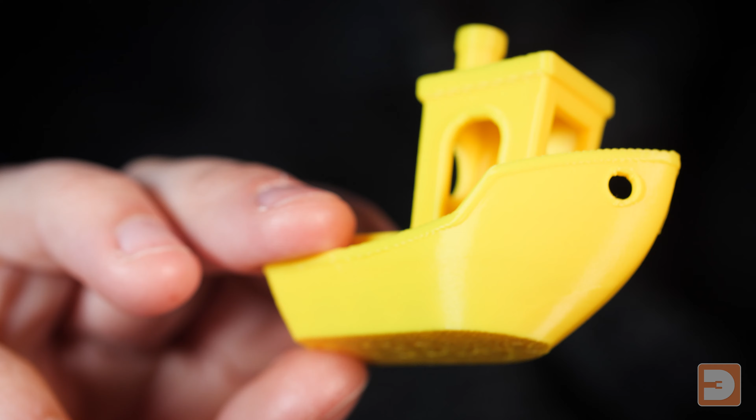When you compare one of these 17-minute benchies, however, to one that is printed at a previous generation speed, whilst the quality is still very similar, you'll notice that on the vertical sides, the finish is very different. This 3D Benchy was printed on the Bambu Lab X1C, but roughly at the default print speeds that would have been used by previous generation 3D printers. Whilst it's printed in a particularly thick layer height of 0.24mm, you can see that the hull is still particularly smooth and shiny. Watch how the reflection rolls over the curve as I turn it.

This Benchy was also printed on the Bambu Lab X1C with the exact same settings, with the exception of this was printed at the speeds that Bambu Lab is famous for, taking just 17 minutes. Take a look at the hull and the vertical sides and note how much more matte the finish has come out on these surfaces. If you see them side by side, it may look a bit more obvious.

So as you've seen here, the print speed is one of the primary things which can affect the surface finish of a print. This is because the faster the print, the lower the precision of material placement right down to a molecular level, and also the more drastic the rate of temperature change for the filament. This is becoming so much more obvious to so many more people because the maximum speed of an average printer has rocketed from around 200 to 250 millimeters a second to 500 and even 600 millimeters a second, more than doubling the potential speed whilst printing.

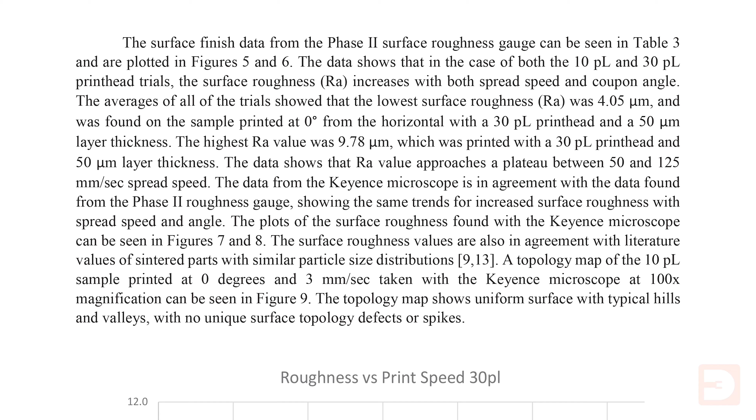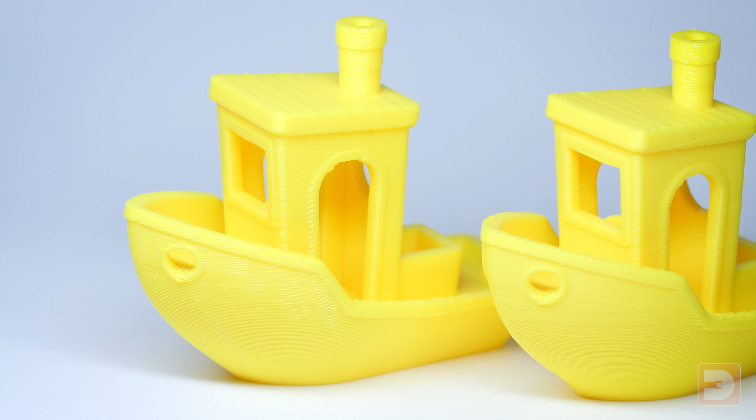There's an interesting paper which I'll link to in the description below, which finds that this effect can actually be more pronounced at layer heights of 0.06 to 0.1mm, and at 0.2mm layer height it can actually be less significant. These benchies were printed at 0.24mm layer height, so slightly above the optimal layer height for faster printing according to that paper. This means that at 0.1mm layer height, this faster Benchy would have an even more matte, rougher finish.

Now there's a suite of speed settings in your slicer, but it's important to note that you don't need to slow all of these down to improve your surface finish. Whilst you might get this problem with a number of new printers and using any slicer, in this video I'm going to be using the X1C and Bambu Studio for the example, but the settings that I refer to in this video can be transferred to any printer and any slicer. Just make sure that the speeds that you're setting them to are appropriate for the filaments that you're using.

Let's jump to a Bambu Lab preset for 0.2mm standard and head over to the Speed tab. The settings in this preset are appropriate for the Bambu Lab X1C, and so it's capable of achieving all of these speeds if not faster. However, the only things that you need to change at your end are the specific settings I'm about to adjust. As a result, providing you start with settings that work on your machine and just change the ones that I'm suggesting by reducing them, this will work with any slicer on any printer.

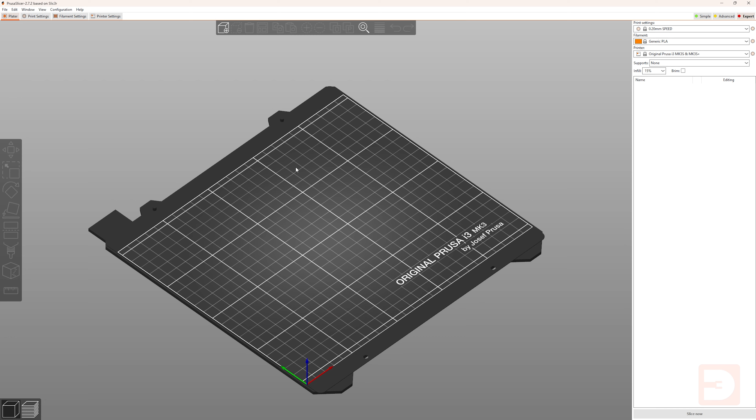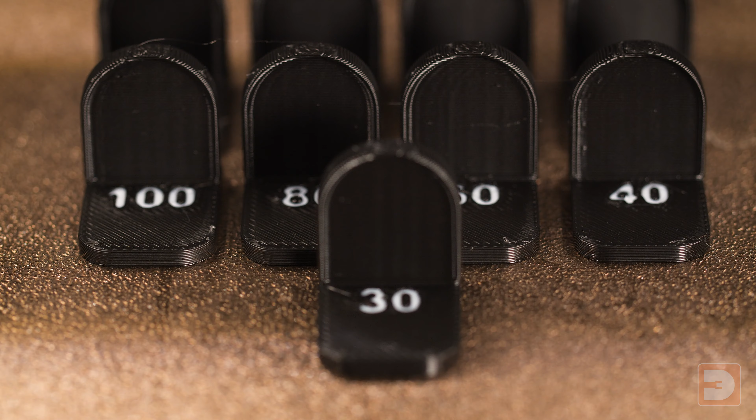Now, as the thing that we're trying to change here is the texture on the surface of your prints, the two primary settings that we want to change here are the outer wall speeds and the top surface speeds. The outer wall speed in this preset is set to 200mm a second. By contrast, the default speed for outer walls in Prusa Slicer, which is referred to as external perimeters in the print settings menu, is 35mm a second. To find the optimum speeds to use here, I designed a simple test print to see what the surface finish would look like at different speed increments.

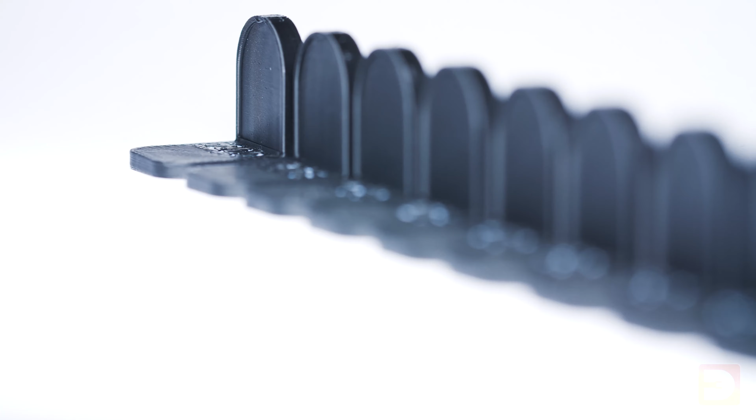Each of these test prints is printed with the same settings except for the outer wall speed and the top surface speed, which is set to whatever the number is printed on the item. If we take a look at how they came out, we can see that as it slows down from 200mm a second, they get gradually smoother and more shiny.

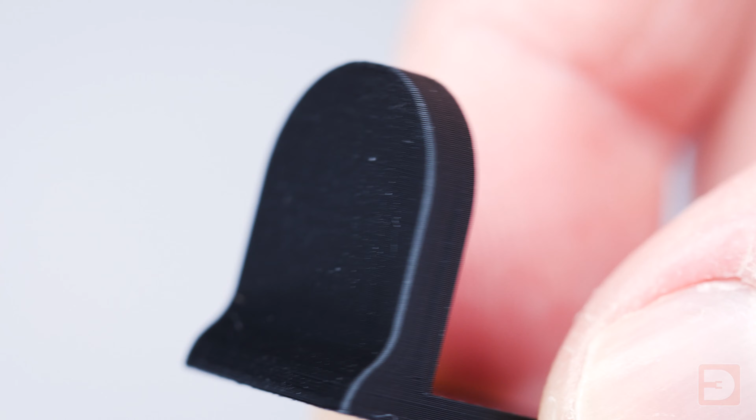I personally feel that 40mm a second provides the best surface finish for the outer wall speed, as I don't really see much of a difference between 40 and 30, so I'm going to go with 40mm a second for my outer wall speed. For the top surface finish, however, I've found that 30mm a second does provide a noticeable difference in quality, and so I'm going to enter 30mm a second as my top surface speed.

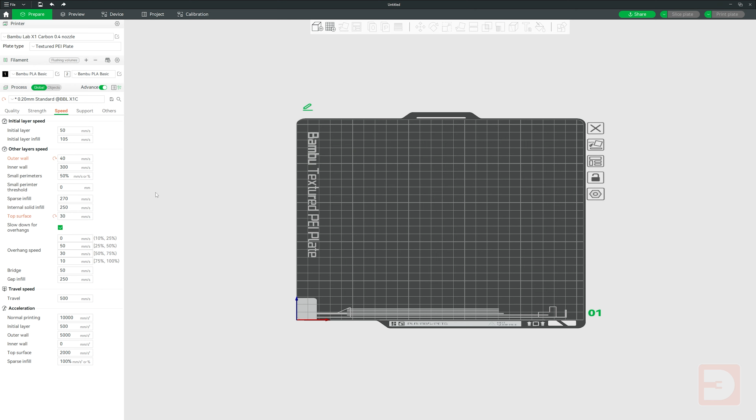It's worth noting that different materials, and even the same material from different vendors, can require different speeds to achieve the same surface finish, so the exact numbers and speeds that I'm showing you here may be different to what you need for your setup.

I've uploaded the designs for this test print that I've shown you here, so you can download them and run them on your own printer with your own filament to find the speeds that work for you, and I'll leave a link in the description below. As well as uploading the files themselves, I've included them in both PrusaSlicer and Bambu Studio projects, which have them preset to have each one printed at their marked speeds.

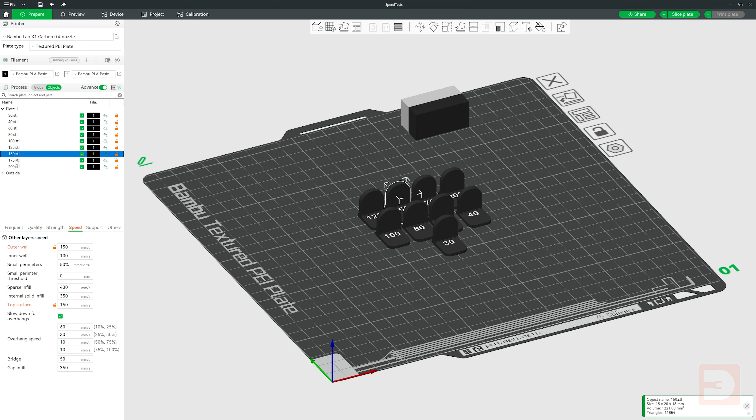You can change the generic settings within these projects to meet your printer's requirements if needs be, and the outer wall and top speeds should remain as I've set them, because an object-specific setting is always going to override the generic settings.

Just because you need to print slower to achieve the surface finish of your previous machine doesn't mean it's going to take as long. When sliced at the speeds capable of a Prusa MK3, a shiny Benchy may take 1 hour and 7 minutes to print. But using the advanced acceleration and movement speeds of modern machines, you can print this even with slower printing speeds in as little as 35 minutes. So even though this isn't putting pedal to the metal, you're still printing in half the print time and ensuring a good quality print with a nice surface finish.

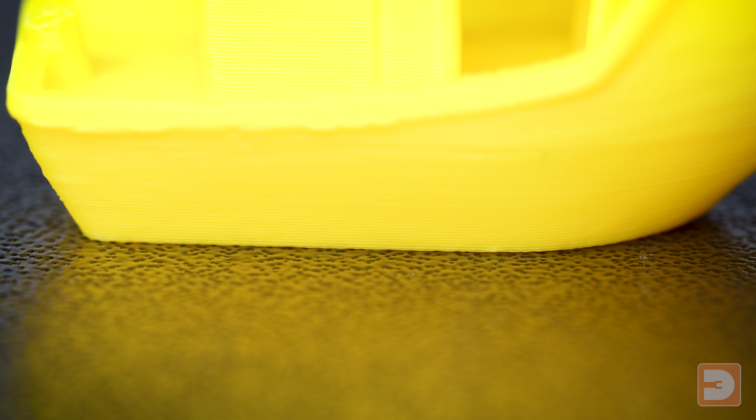The initial layer isn't usually affected by this issue, as it's by default set significantly slower than the rest of your print, and is also held against your bed, which usually results in a flatter, smoother finish, unless you're printing on a textured bed, so you can leave this as default.

The rest of the speed settings aren't going to directly impact the surface finish of your print in terms of being matte or shiny, but they can absolutely have an impact on quality, with the speed of your inner wall, or perimeters setting in PrusaSlicer, potentially affecting accuracy and imperfections in your outer wall.

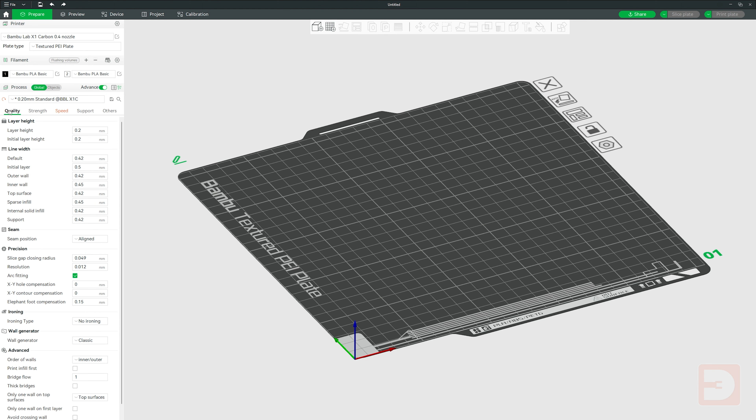So, if you're finding that the prints on your new machine are coming out matte and you want them to shine, the main thing to do is to slow down the speed that the exterior of your print is being printed at. Whilst the top surface of your prints is usually less of an issue here, if you really wanted to smooth them out and make them shine, you can also activate ironing, which is something that I'm going to be doing a specific video on very soon.